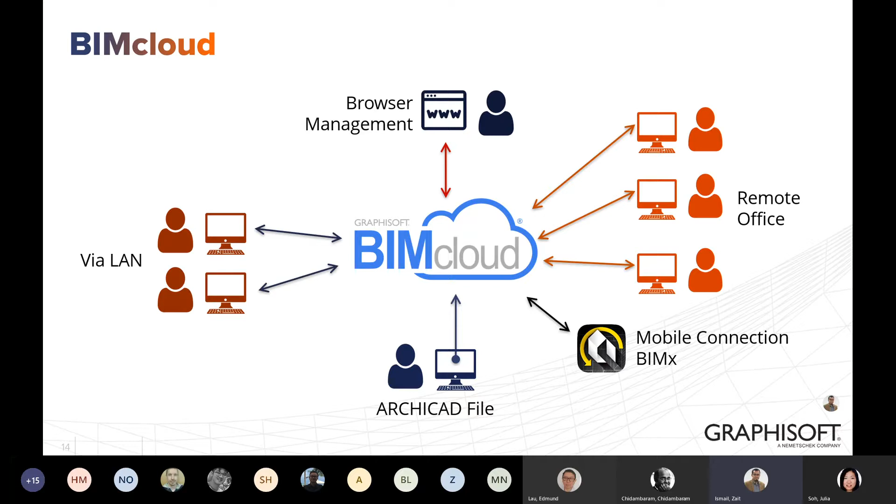So for huge firms, there's BIMcloud, which is the paid version, but it can be accessed through various remote offices around the world.

Basically, there are 3 basic components of BIMcloud. First of all is Archicad, the authoring tool. Then the BIMcloud server, where we store all our projects and data. And it also has a BIMcloud Manager to manage all the access rights of the whole system.

For the IT structure, it's basically a standard office network. It works in any standard office setup through any standard computer network, through LAN and over the internet. So there's a two-way connection between the clients, which are the computers, and also the BIM server and the manager.

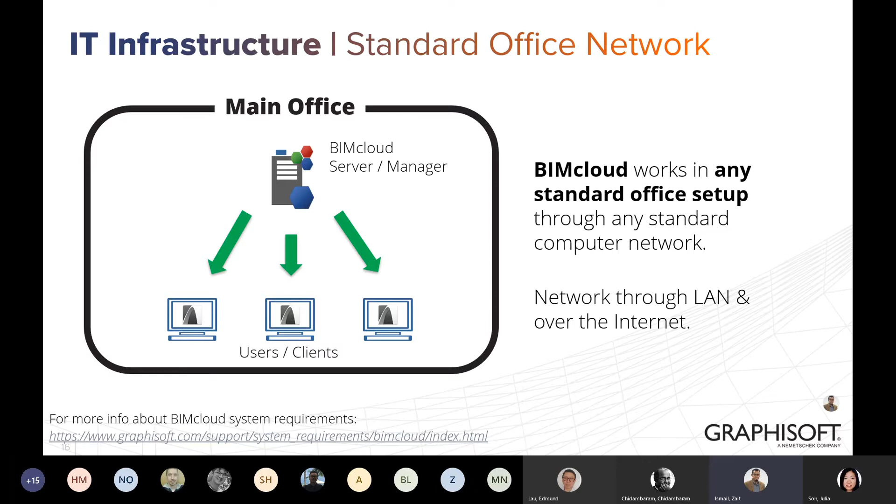So the first one, BIMcloud Basic, is the free one which I've already explained. It works within the office, but this BIMcloud Basic works only with similar versions of Archicad and BIMcloud, and it's managed by your company's IT team.

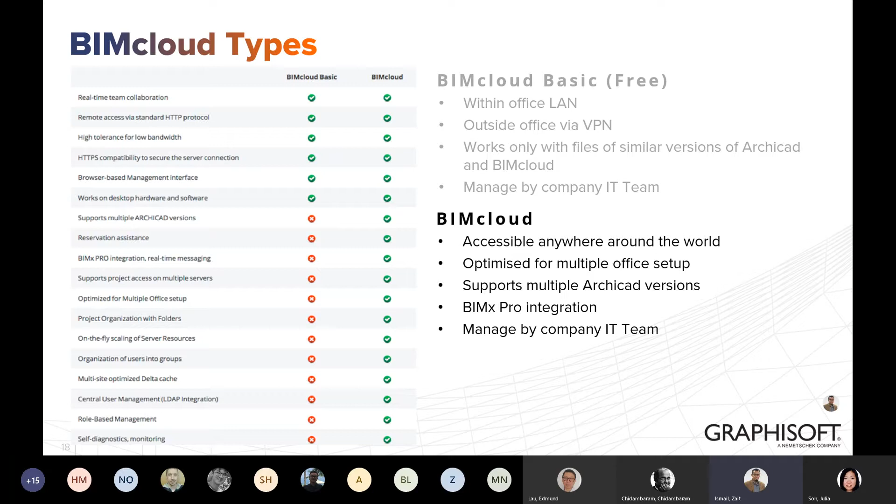The BIMcloud paid version can be accessed anywhere around the world, and it's optimized for multiple office setups, supporting multiple Archicad versions. There's also integration with BIMx Pro, but it's managed by the company IT team as well as the hardware.

But there's also BIMcloud as a Service. It's almost similar to BIMcloud, but this service is actually managed and handled by our Graphisoft team in Budapest.

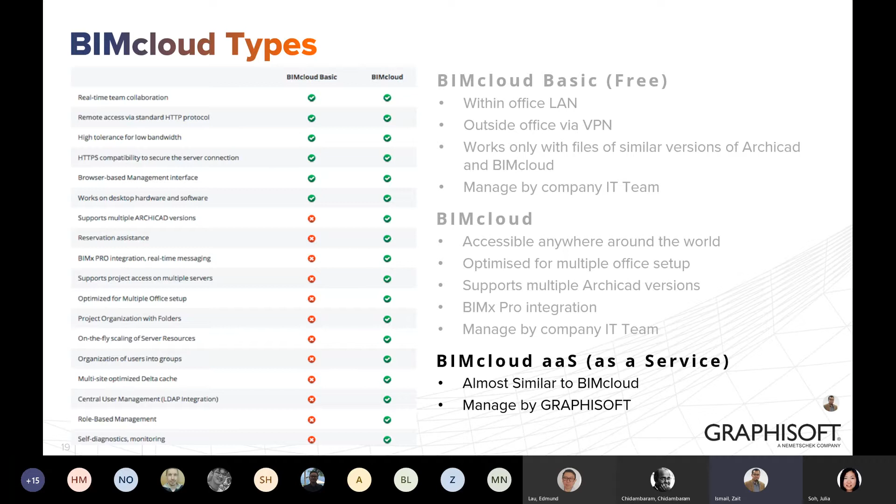So basically, in the BIMcloud Manager, the user or the IT manager, whoever is in the team, will have to have a login credential. This is important for security. Then you can access all the projects, users, roles, and libraries.

For today, I'm going to also talk about roles. The roles are quite important because they involve security and all that. So by default, we always have roles like architect, draftsman, and lead architect. The lead architect role will be higher than the draftsman or the viewer.

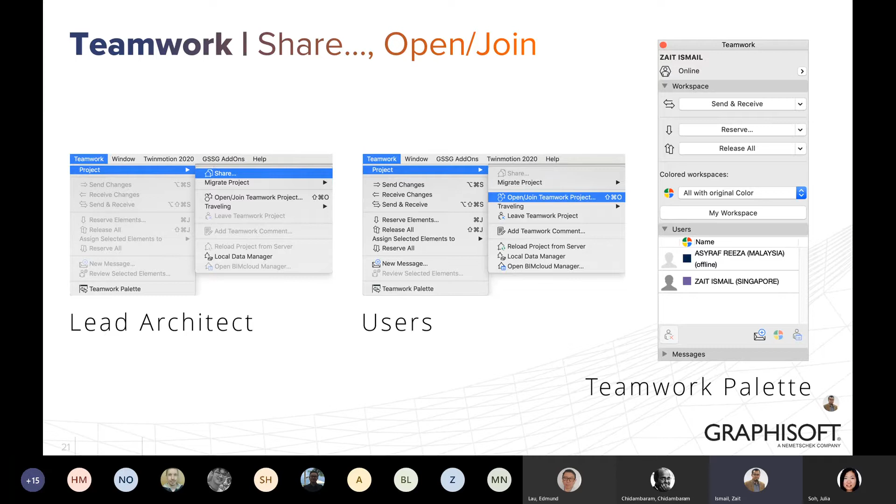So basically, what users would do in Archicad: when a lead architect does something, even a simple grid line, he would go to the teamwork menu, go to the project, and then share the file. Then the rest of the team will go to their own teamwork menu in their own Archicad, and they will open or join the shared teamwork project. All the management of the project file, whether it's saving or otherwise, will be controlled in the teamwork palette.

Without further ado, I think I will show how it works. I'm in Singapore right now, and Asyraf is in KL, so I'm going to show you how this thing works.

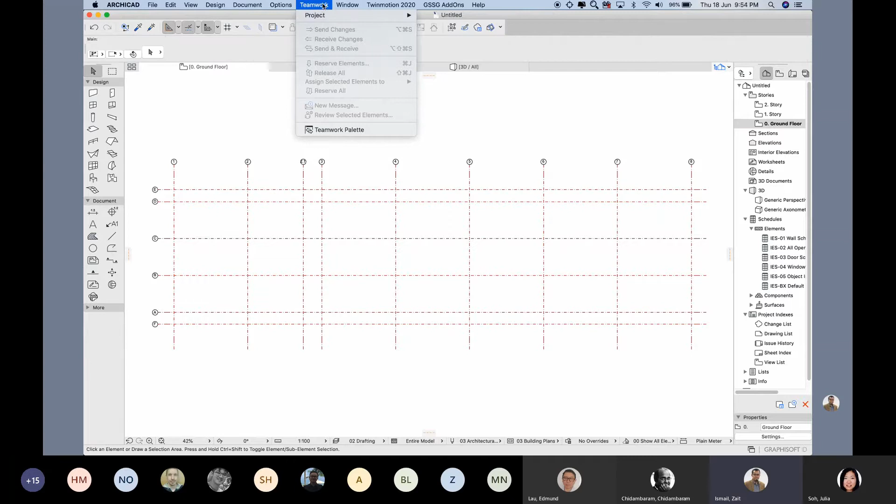So basically, let's say an architect has done a simple grid line. You will just go to the project and then share. He will share the file, right? So the next guy who comes in from another machine will join the project.

So this is a building that was created by our Budapest team, and I'm going to use this project. If I go to the floor plan in a real situation, I got a message asking, can we do something with this toilet? Do we need these doors between the washroom and the WC? So what I would need to do is maybe create a bubble, because I'm going to ask Asyraf about this decision, so it's easier for him to see.

Okay, I'm going to make this display order to front so he can see the bubble in front. Next thing I need to do, I need to send him a message.

To Asyraf, right? I'll put in some message and capture the view so he can look at it and open it immediately. Then I send it to him. After this, I'm going to pass this to Asyraf.

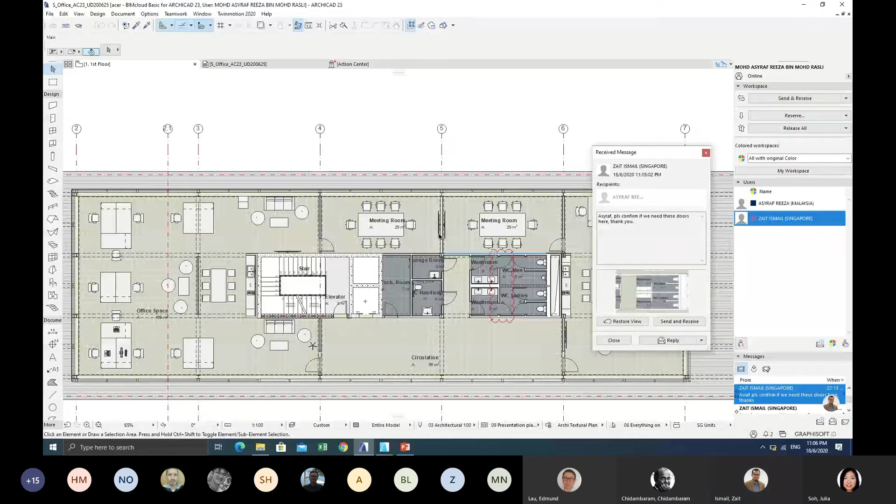Hi, okay, now I'm in Malaysia. I just received a new message from Zait. It says, Asyraf, please confirm if we need this door here. So I want to know what that is, right?

From here, I just click restore view, so now I can automatically zoom into that specific thing. I write back saying, maybe we just remove the door and shorten the wall. I set that as high priority, mark it as received changes, and then send back to Zait.

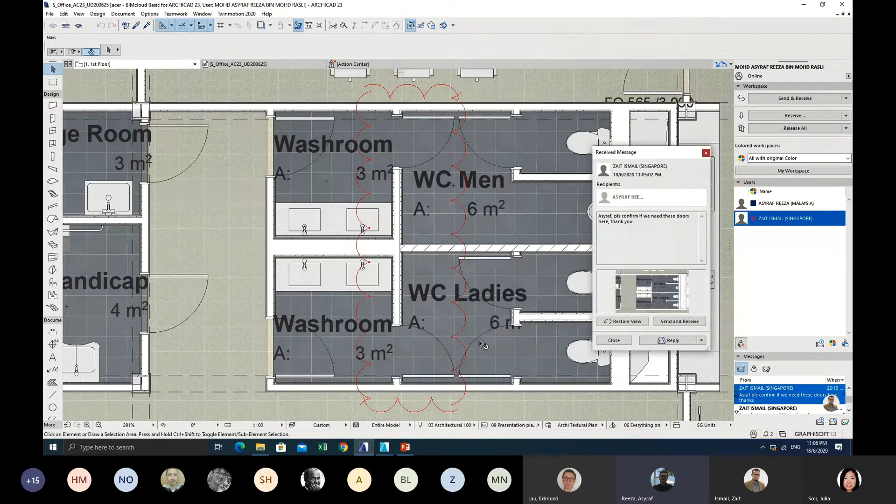Okay, now we go back to Zait. Once I receive the message from Asyraf, I need to do something, right? So we don't need it. Because of teamwork, I cannot just remove the door like that.

I need to click the reserve button because this is due to security, so we know who's changing what. So I remove these doors, and of course I need to shorten the wall. Once I shorten the wall, things are okay, right?

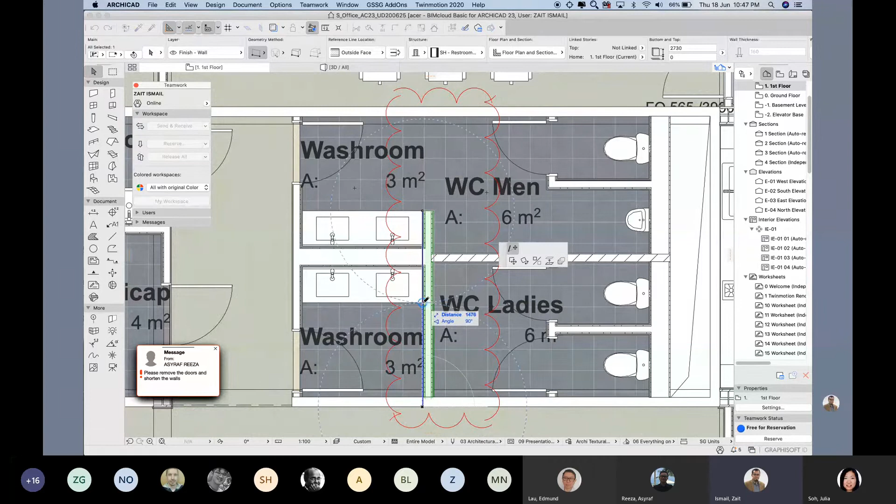So then I'm going to send the message to inform Asyraf that it's done. I'll send a reply to him. Same thing, I'm going to capture the view, and then send and receive.

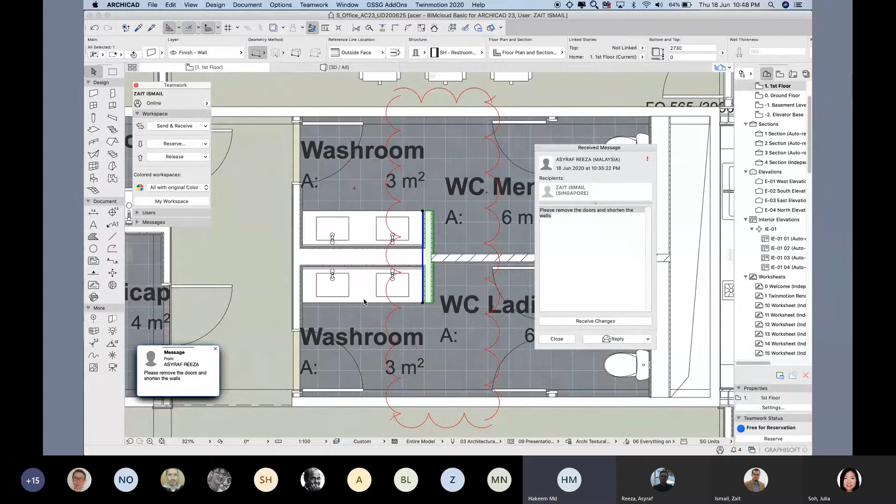Okay, from my side, I just received a new update from Zait. You can see now, automatically, when I click receive changes, the wall already gone, right?

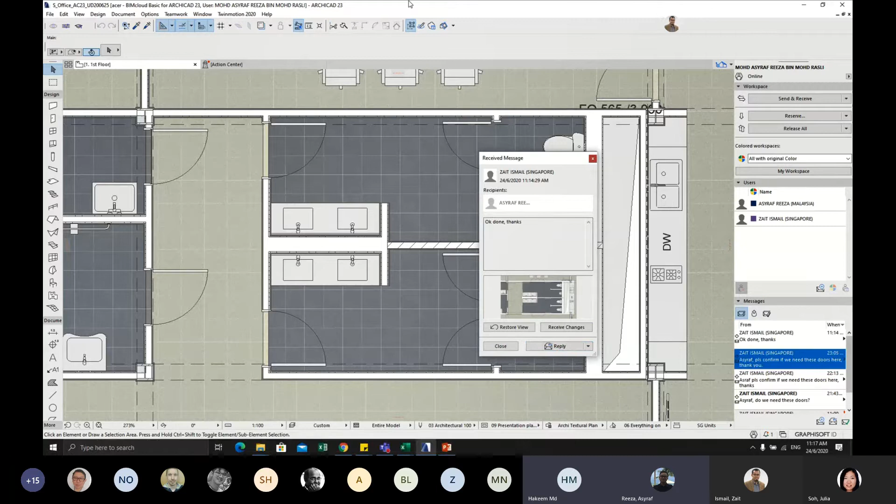So if you notice, I'm working inter-country, meaning Zait is in Singapore and I'm in Malaysia. So this teamwork can help us, especially when facing the MCO situation. You back, Zait? Okay.

So basically, in a project, communication among team members is very important. But in this case, we can do it within Archicad. And then with teamwork, whether you work at home or office, there's no problem at all. So with or without MCO, work still goes on, correct?

And then because of teamwork, it's very flexible. We gain speed and productivity too, so maybe we have a shorter deadline for some reason, and the bosses can allocate more staff to join in. And then coordination and collaboration is done in real time.

That's the best part of teamwork, so any changes you see on the spot, right? Okay, so now this is the end of the teamwork demonstration.

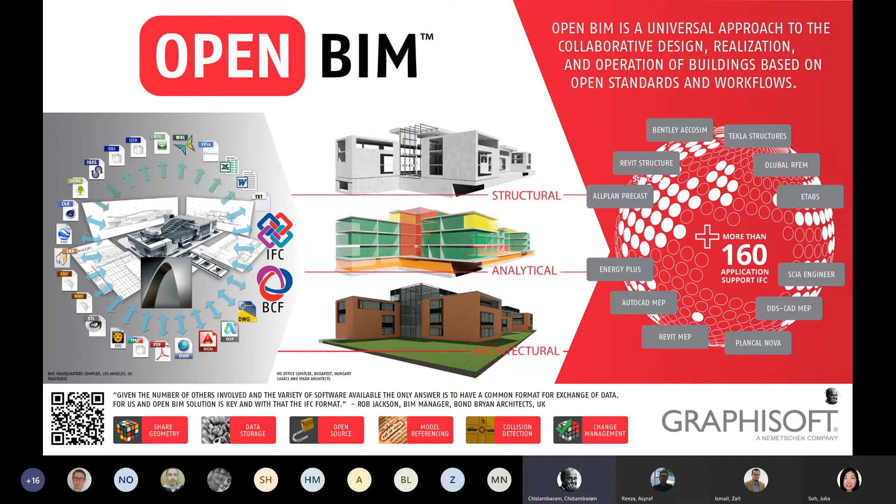This can be used to come up with your own architecture. This example is coming from Nikken, Japan. They basically use Graphisoft Archicad as a central platform and bring in data from many different formats, many different applications. You can see Tekla is there, ETABS is there, Revit is there.

Even they use tools like DIALux. Of course, we have Rhino Grasshopper connections. So some of the connections are natively supported, some of them are through IFC, some is maybe by text files. Nikken also developed their own converters, so those are highlighted in red, you can see that.

So basically, when you decide on a workflow, you have to form something like this - who is going to use which software and how you are going to communicate, what is the format. Once you've decided, you can go ahead with the project. In this case, Nikken is using Archicad as a central platform to bring in all the data, because Archicad supports many different file formats.

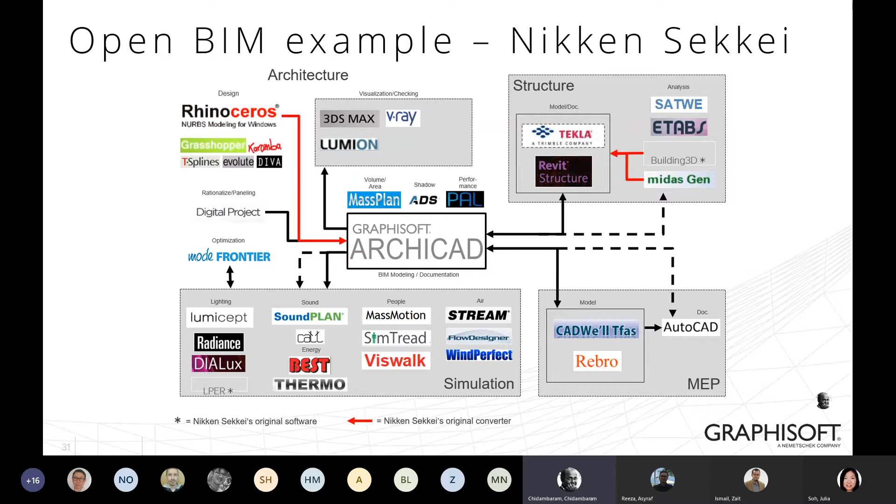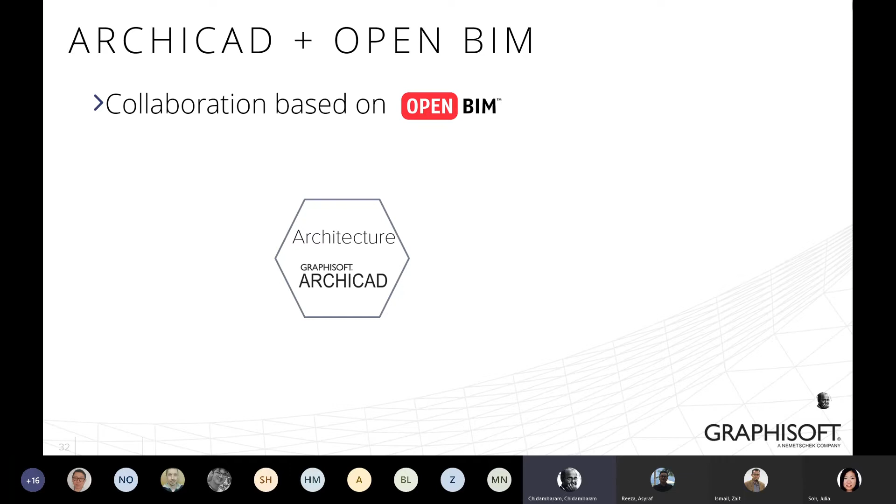Right, so next I want to share some tips and tricks. The first thing is, what is the possibility? When you do projects, what can happen? The first thing, you're all using Archicad - that's why you're all here, I know, right?

So maybe your engineer or somebody in the partner is using Tekla for civil and structural. So what you can do, how you can exchange between them, is we call selective exchange and a reference model concept. These two concepts I will explain in the next slides.

Similarly, what happens is maybe you have a MEP engineer who is using Revit. Then you can do the same thing - selective exchange and reference model - between them. And when this happens, definitely you need a tool like Solibri, which is also handled by our team. We can actually bring in data from different BIM authoring tools and federate inside Solibri to check the quality and also regulatory requirements. You can check the model, and once the model is fine-tuned and in good quality, you can exchange with your QS, and they can do cost estimation.

They may be using different software - if you see here, every party is using different software. So that's basically the Open BIM concept. You don't need to restrict anyone to use a particular brand, particular version, or any particular software. You can use many different brands suitable for the purpose, right? So it is meant for the purpose, and it's easier.

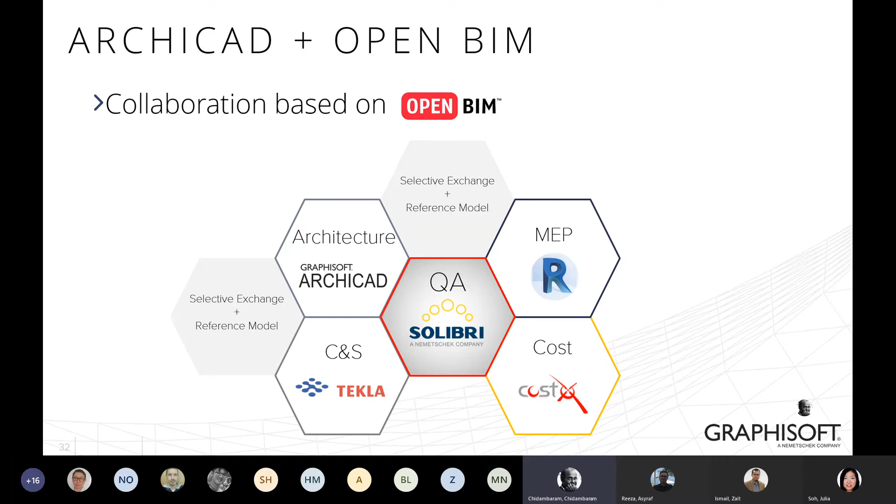So let's move on, and we want to understand what selective model exchange is a bit more. It means exchanging only what is necessary for the project partner. If the project partner needs only certain information, just give them that information. Don't give the entire model and ask them to figure out how to extract it.

By doing this, it's easy to communicate. For example, structural engineers are interested only in structural elements, like load bearing elements. We can use Archicad to filter and send only the structural elements out. Similarly, MEP engineers are always interested in rooms, the spaces. You don't need to send the entire column, slab, and all those things. Just give them the rooms, and they should be able to work on it. So that's the selective model exchange concept.

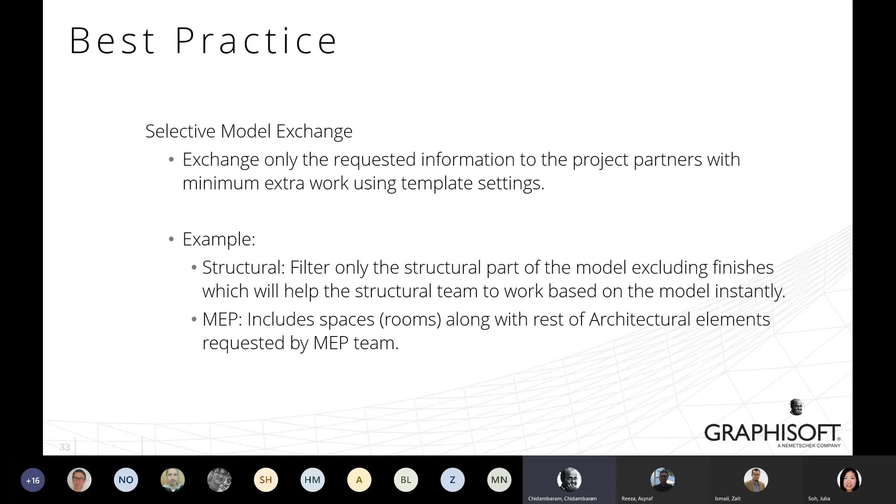So the next concept is reference model concept. What is this actually? Reference model concept helps in change management. The team shall keep the IFC file import as an independent native file, in Revit or Archicad, and link that to their project. So don't import the IFC file into your project. Ask your partners also not to import the file into their project, but keep it as an independent native file.

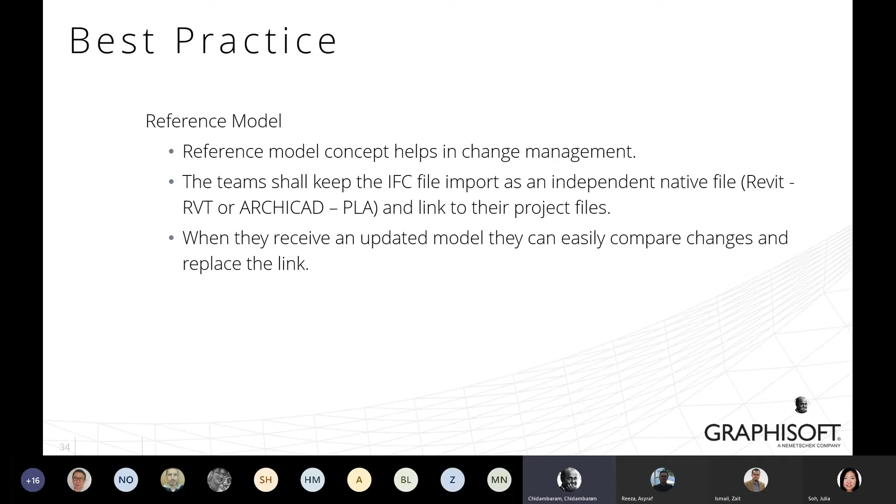Then, in case you receive an update, you can update the model easily. If you put it inside the project, you don't know which one is created by you and which is from the IFC import, and that will cause a problem. So it is good to keep it outside. Then anytime there is an update, you can replace it.

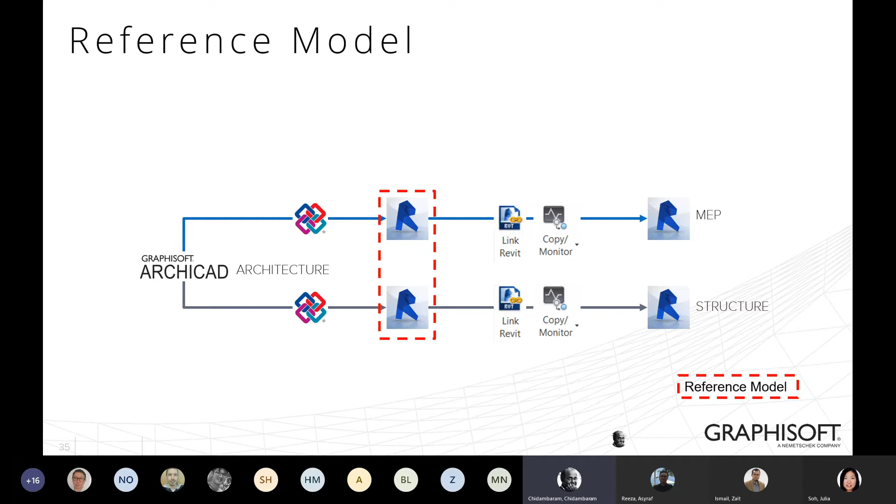So that's depicted in this diagram. You start with Archicad, architecture, or any discipline. Once you have it, you export as IFC, and the partner receiving it can create an intermediate Revit file, which is the reference model. This can be linked into Revit, and in Revit the project is there for MEP and structural. They can link your Archicad model and work on it. Once they finish their design development, they communicate back to you.

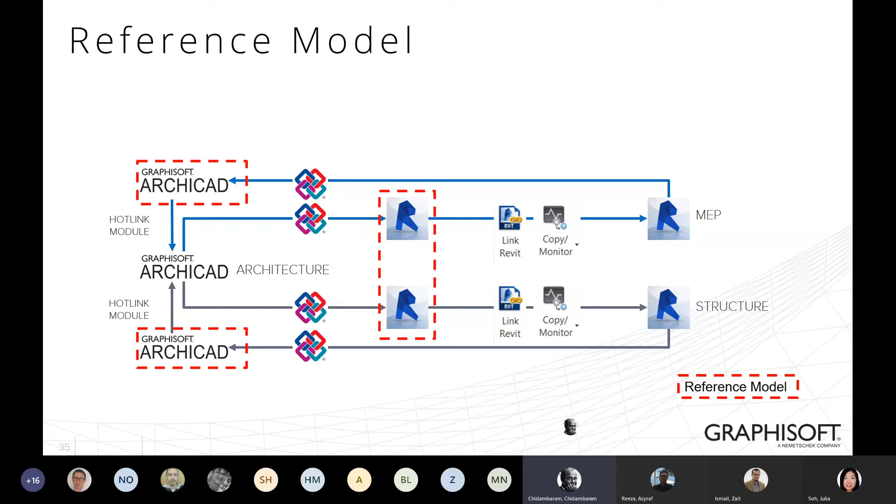They send it back via IFC file again, and when you receive it, don't put it into your project. Create a separate Archicad file, which is again a reference model, and this can be hotlinked into your Archicad project. This way you know which is coming from your partners and which you have created, and it's easy for you to trace reference. You can compare them and work on it easily. So this is the reference model concept.

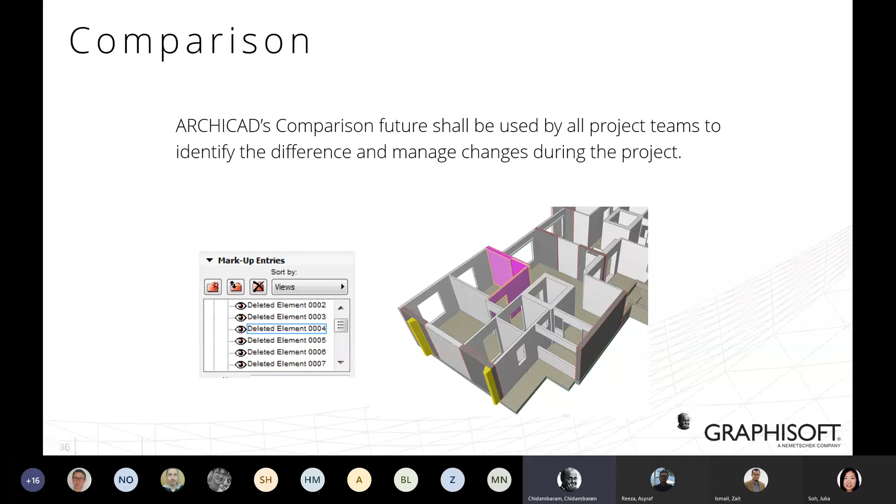So comparison is a good way to see what is deleted, what is added, then you can decide what to do with it. Similarly, I also like this feature of Archicad always.

You can do a trace reference. You basically import the IFC file and create a 2D view of the structural model, put it below your architectural floor plan, and check using the trace reference what has changed.

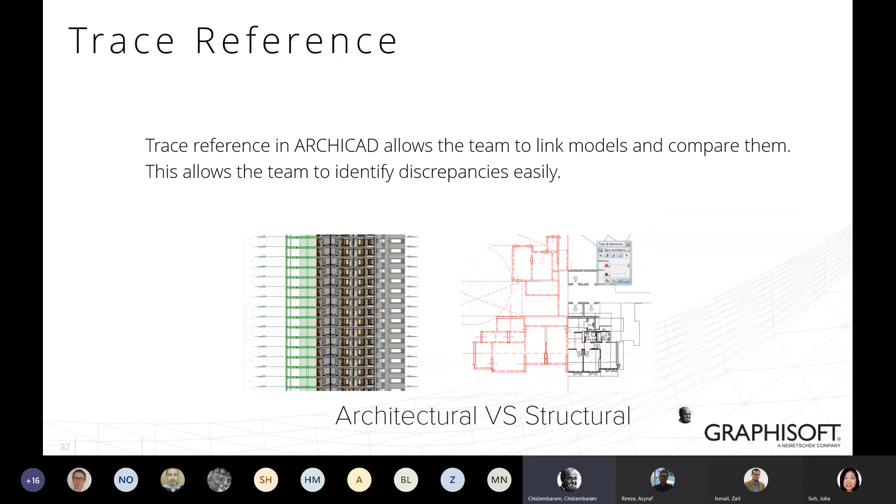And the next tip I want to share with you is BIM collaboration format. This is the file format, another open BIM format. You can use this to communicate your issues. You can document the issues inside Archicad, inside any other tool, or even inside Solibri. This can be saved as a BCF file, BIM collaboration format, also coming from Building Smart. This file will allow you to communicate and document the entire issues. It will have the snapshot of the place, the location, and even the camera location.

It will bring you to the exact location, and whatever comments added by you will be seen there. The file is really lightweight, so you can just email it over. You don't need a server to do it. You are not exchanging the entire model, just exchanging the file.

It's much easier. So in case your bosses receive this, they don't need to have Archicad, Revit, or Solibri. They can install a simple desktop application, most of them free, and view the BCF file and add their comments. The bosses will like it actually.

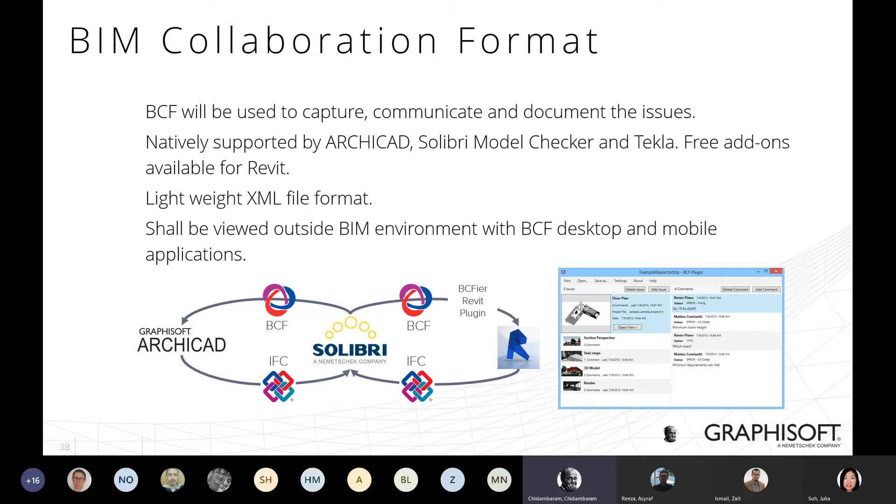So easier to manage. The BCF file format is really getting better and better, and people are using it. That should be used in any OpenBIM workflow. So if you're going for OpenBIM workflow, you must use BIM Collaboration Format.

Let me move on. So what are the other things Graphisoft offer? We developed a plugin for Revit to make it easier. We know sometimes it's difficult to ask Autodesk people for some development, so instead we developed a plugin for Revit where we can actually control the outcome.

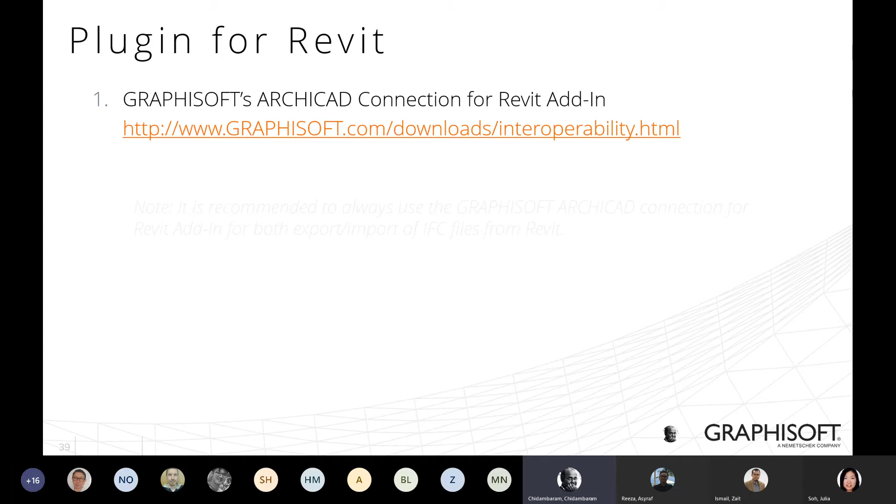This particular tool or add-on can be downloaded from the following link. What it does is it improves the export and import. First, you can look at the export - there's much more things to share here.

You can control the visibility of the elements. Shared coordinate system can be exported. You can split elements by level. Property sets can be exported, and more controls are available. So the data export from Revit will be much better if you use the plugin.

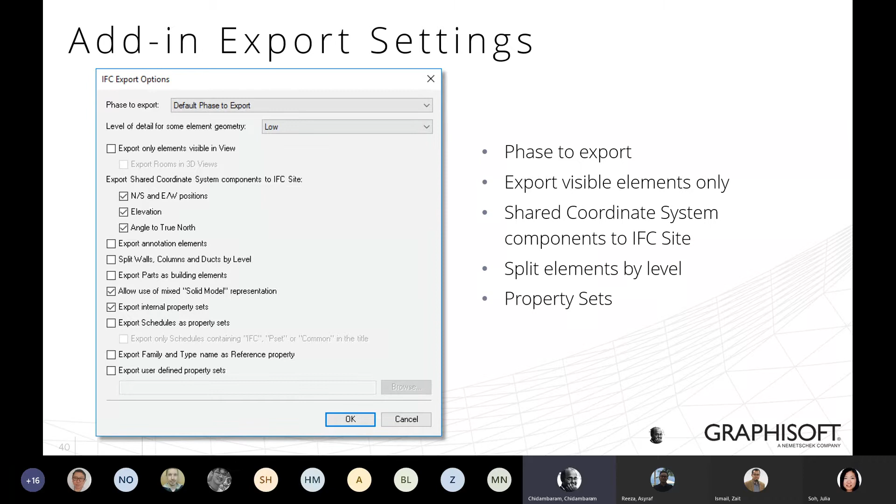Similarly, the import is also improved. Certain things I want to highlight: the true north of the data, the spaces convert to rooms, then you can import elements and auto-join things. Another thing is Revit normally uses faces, lines that become a slightly off angle - that can be corrected automatically too. So these are the improvements.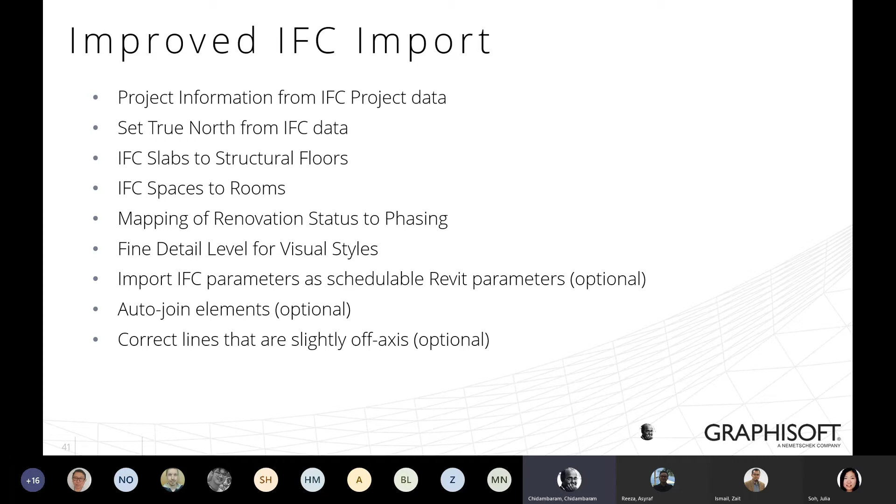Definitely it is much better to use the plugin so that the data will be better in Revit.

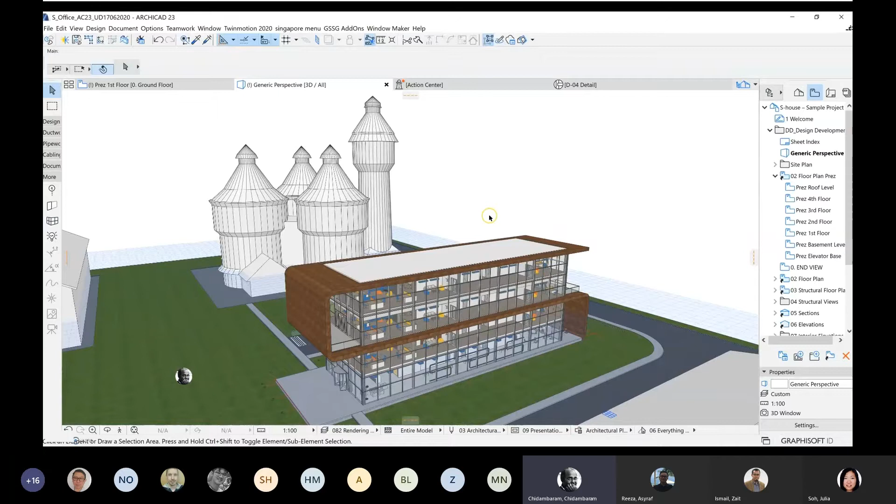So next, without further ado, I will bring it to the demo. Just to let you know, this particular demo is pre-recorded, but I recorded it in a way that I'm going to do it today here online. Because of online, I don't want to have any technical issues, that's why it was recorded. You can see the video here, I will take you through the video and voice it over.

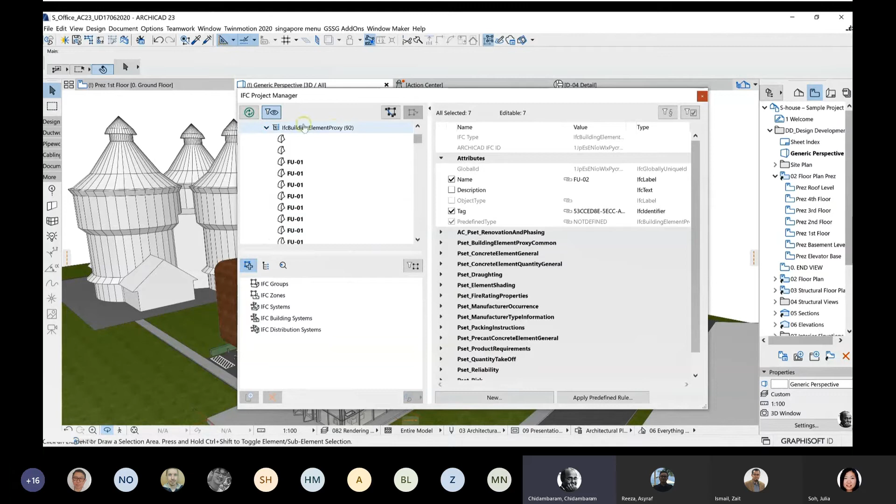This particular project is similar to what Zait and Asyraf were using. We call this the S-house, our popular model for demos. First thing I'm checking here is the data quality in the IFC Project Manager, so I can see all the data. Whenever you see Building Element Proxy, that's always the culprit which causes problems sometimes. You can check where it is coming from - you can see it is furniture.

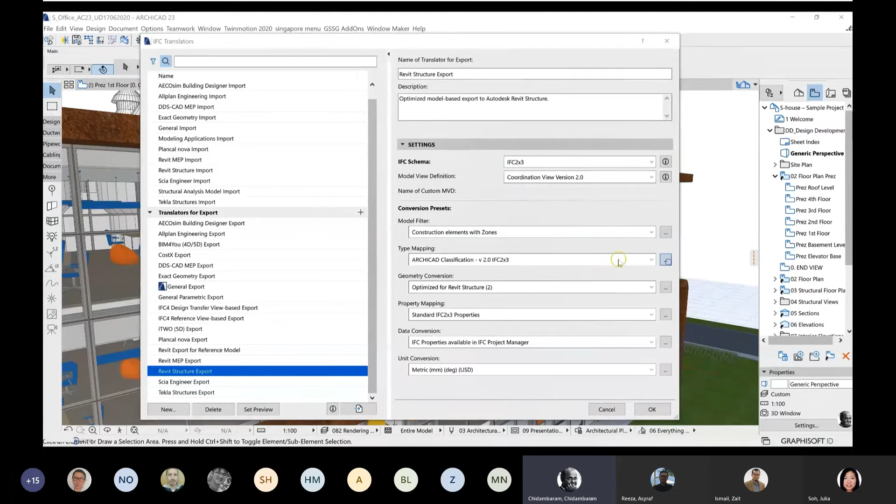I'm going to exchange the data to the structural engineers, so it's okay, I can keep it as furniture, as a Building Element Proxy. The next thing I want to check is the translator. You can go to the translators and see what kind of translators you have - there are many here, I'm checking the Revit Structure one. You can see the filters which allow you to choose what to export when you export the IFC file, and you can choose the schema, IFC 2x3 or 4. Another important thing is to do the type mapping - inside the type mapping you can choose the element and make sure it is exported right.

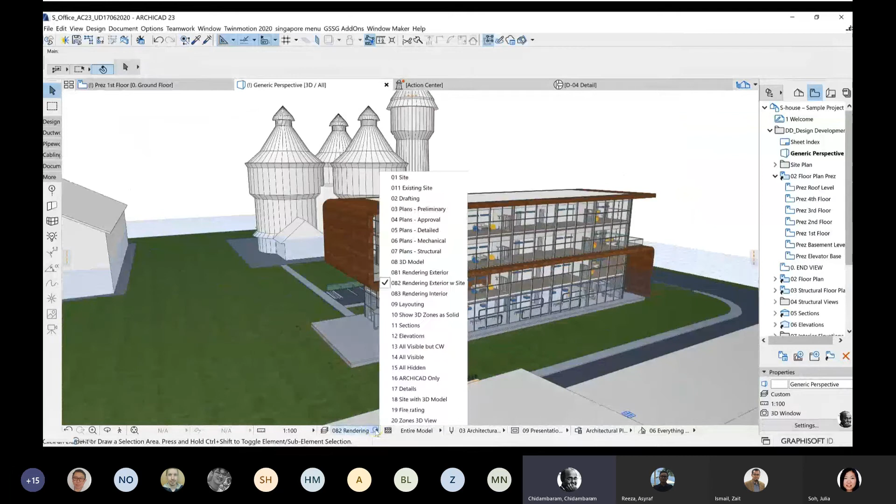So in this case, the slab goes as IFC slab, but I want it to go as a predefined type floor, so I can change that, which will go as structural slab when it goes to Revit. Once that is done, selective exchange comes into play.

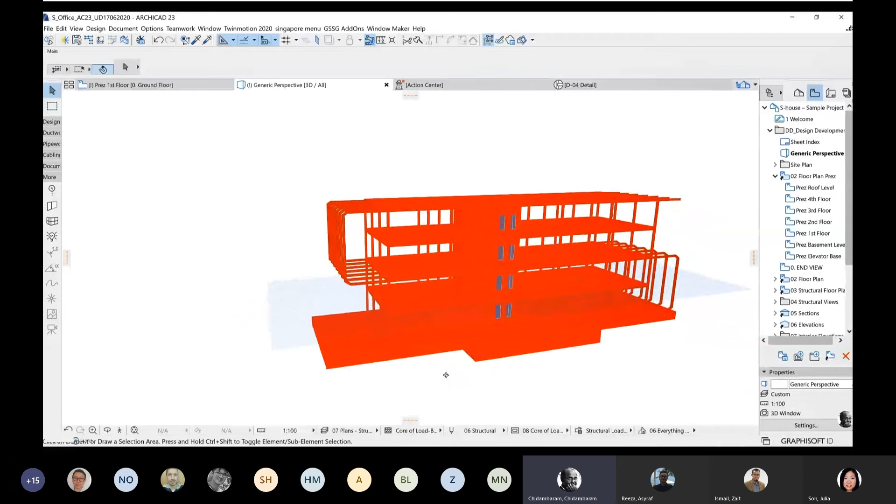I'm filtering and showing only the structural elements, controlled by layer and pen, and I also want to change the visualization to check whether my selection is correct. When I look at it, I realize there are some doors also there, so I check my model to see what is going out. Now everything is OK, except there are doors.

For the doors, it is controlled by the filter, so I go inside and uncheck the doors and windows. I don't want to exchange this to the structural engineers. This is what I was talking about in selective exchange - structural engineers receive only what they want to receive.

Everything looks fine, so now I'm ready to export. Saving an IFC file from Archicad is just go to File, Save As, choose the file format and the translator, and save it.

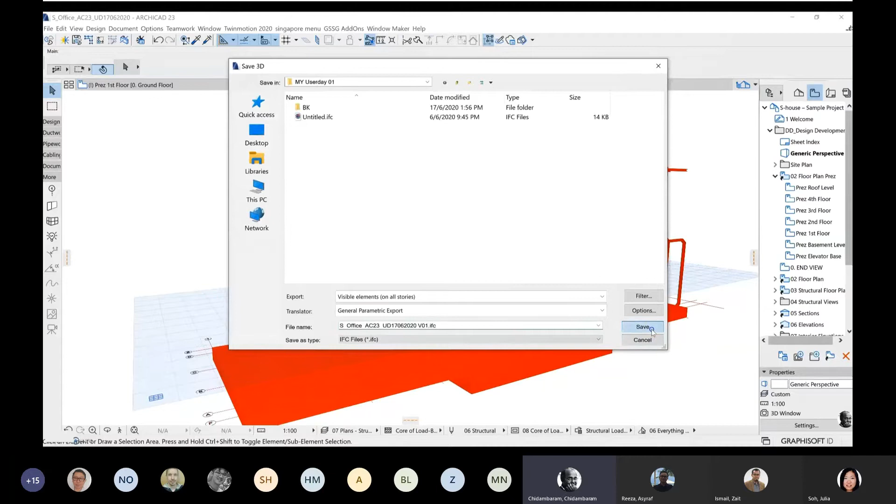So that's saved, you can see the file is going. Normally Archicad is quite fast. I will let it run in actual time - I didn't cut short any of this - to show you how much time it takes.

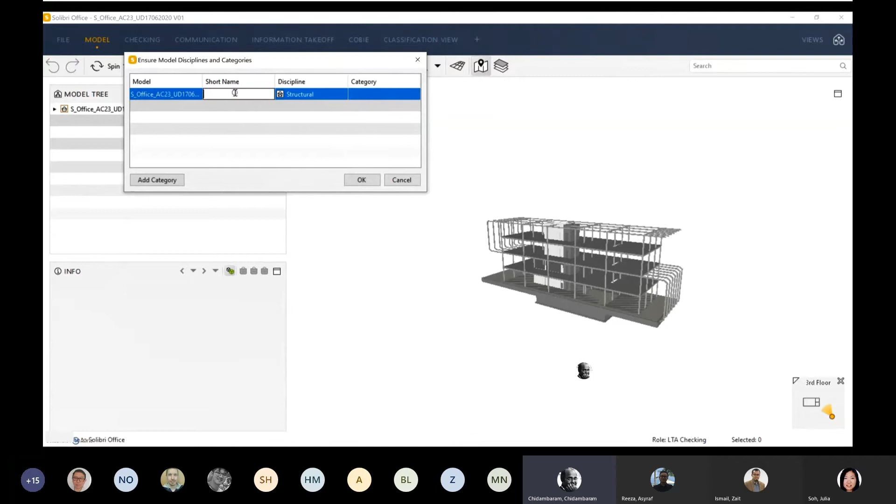So you can see here, I'm actually checking the model in Solibri. This is a good way - you can bring in the model to a common platform like Solibri to check the status of it. You can actually check and realize the big floor slab is missing.

And then I come back to Archicad and check that particular slab here, to see what is happening to the slab, and you can see there is a solid element operation.

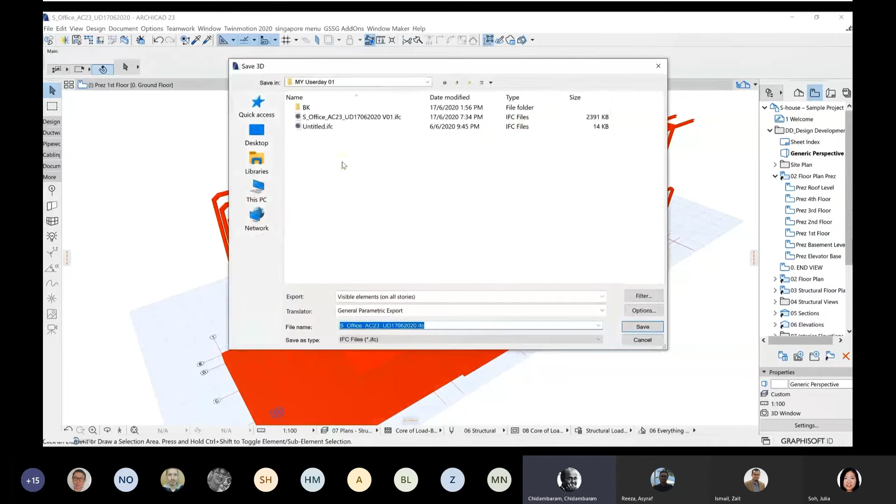This solid element operation causes some issues, so I uncheck it. It doesn't change the shape of the slab. I export it again, this time to another version.

So you can see it is going in. I'm saving the file now.

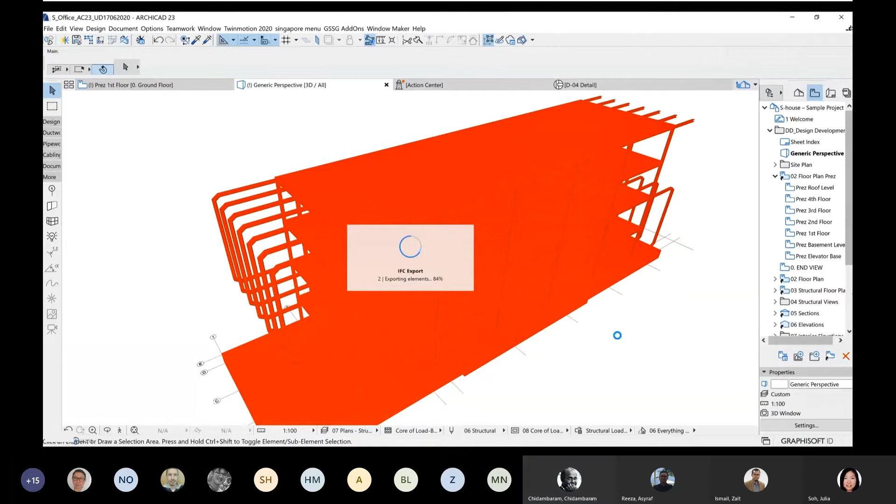So now I go to Solibri to update and check, make sure it is correct. I choose the update model, and here I choose the version I just exported. Then you can actually see the update coming in. Everything looks fine for me.

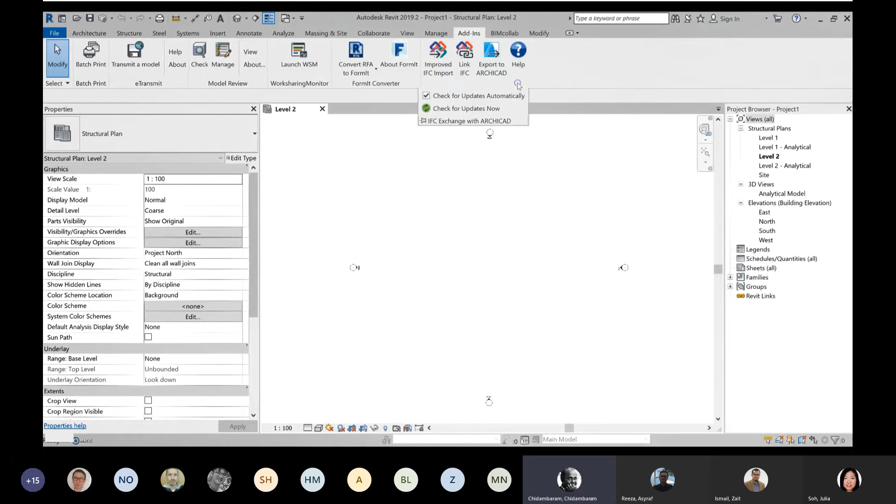Now I switch to Revit. I'm ready to check in Revit, and I'm using the plugin developed by Graphisoft and choose the IFC Import.

This version is OK, and I choose the functions - I want to auto join elements and correct the lines. Then I open it.

I purposely leave it a bit to show you the actual time taken. Normally, be patient with it. This needs to be done at least once for a project to check the quality of the data. First time when you are exporting, there will be some missing data and things like that. Also note about the time taken for Archicad - if it takes like 10 minutes to open, Revit may take 30 or 40 minutes. Sometimes it depends on the file complexity, but here you have to go through this once.

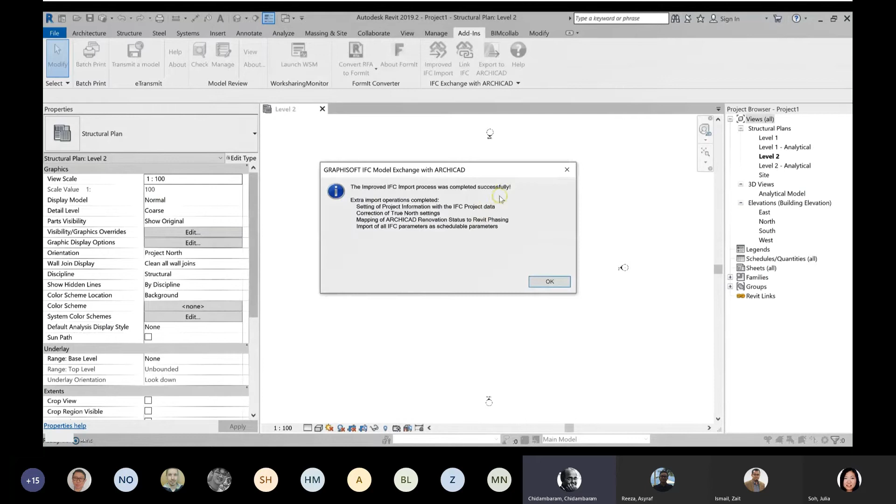So you can see some errors coming in, so better to visualize it in 3D. I'll say OK here and go to the next step. It will go through the import anyway without stopping. And you can see it is imported successfully. I'll say OK.

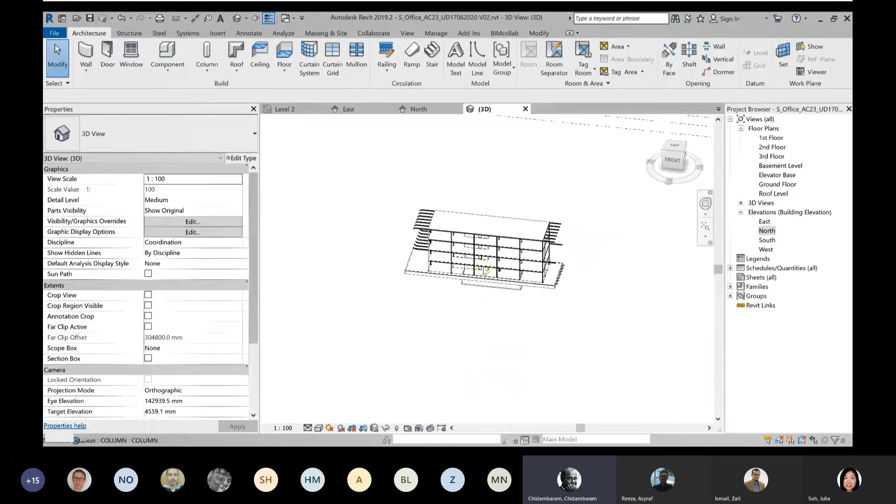Then you can see the content in 3D to check. First it opens in section, so I need to switch to 3D window. When I click on the 3D window and zoom in, I realize what is missing actually - you can see those elements, the vertical ones, are missing. There are also some horizontal members.

So I'll check on the other side also, just go below and check. I'm OK, I somehow know what the missing ones are. Now I want to go back to Archicad and check what is happening to those elements. So when I check in Archicad, I select those missing elements.

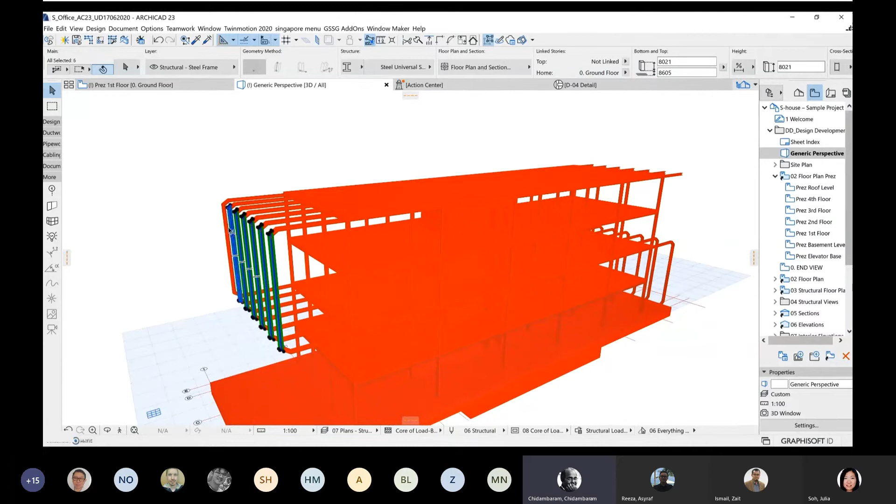I can go to the settings of those vertical elements, which is created as a column, and check what is happening there. Then I realize there are actually end cuts there - this end cut is the one causing the problem. I did the check before, so I know it. You can see it looks a bit ugly, never mind - the engineers, what they need is the position of the column.

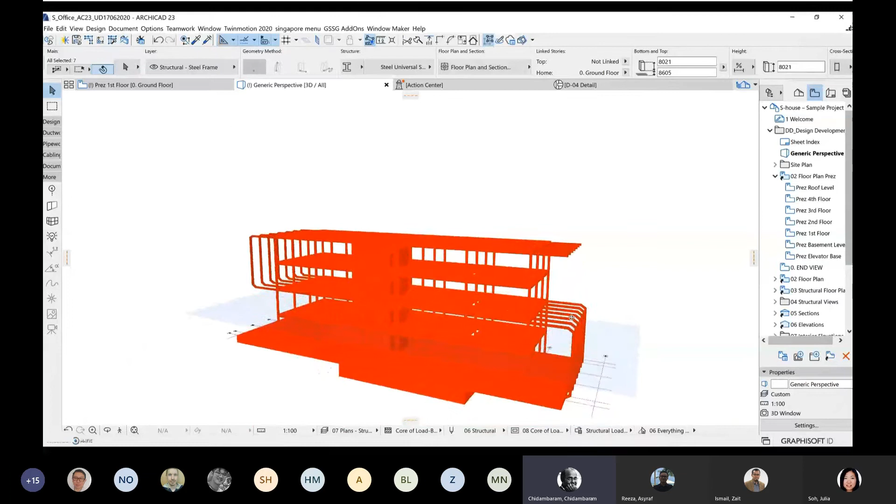So I'll just leave it as it is. You can actually do the same thing on the other side as well. So again, all this can be saved once, and then we can actually use the same setting again before we export. We can change the setting.

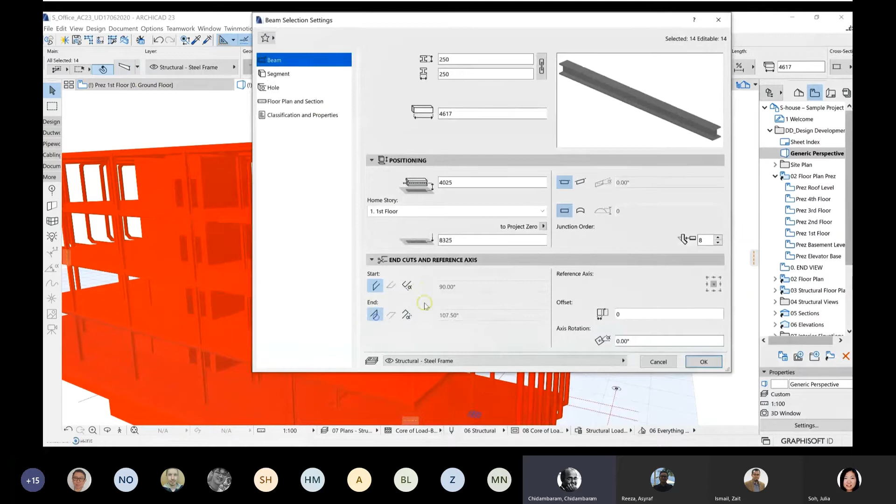It no need to be saved as part of the architectural model. You can actually do it only when you want to export, because the architecture model, I don't want it to look not nice, right? So the connection have to be nice. So that's done. I save as another version. This time it's version 3.

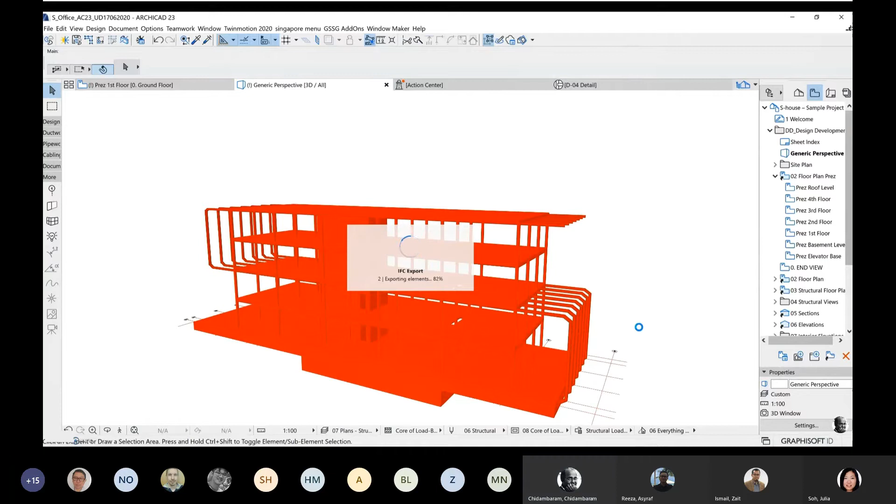Just be a bit patient. Once it is done, I can now go back to Revit and then I can import again. This time I choose version 03, right? So I will open it.

Ricky was asking, is there a list of known issues? We have to check on a project by project basis, figure it out each time. Some projects, every project have different issues actually. So once you figure out what is the reason, then at least we know that issue doesn't exist anymore for that project. Because on both the Revit and Archicad side, these tools are getting updated all the time, so it is very difficult to define the list of known issues. It's a common question people ask, but it is difficult to define actually, right?

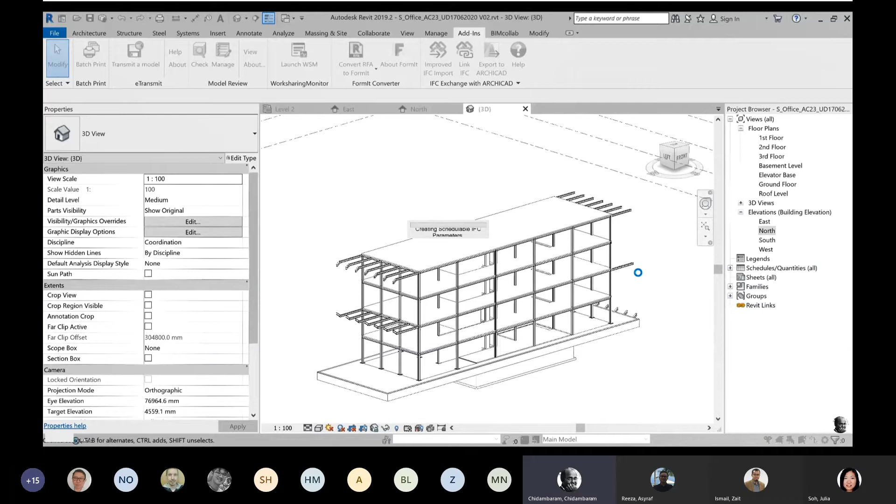So once it is exported, you can actually see this time it doesn't go through that error, right? It straight away goes to the import option. So the import is already fixed, there is no error shown. So this is how I figure out what is the issue, then I fix it. It's a bit of trial and error, I have to say. But yeah, everything is okay.

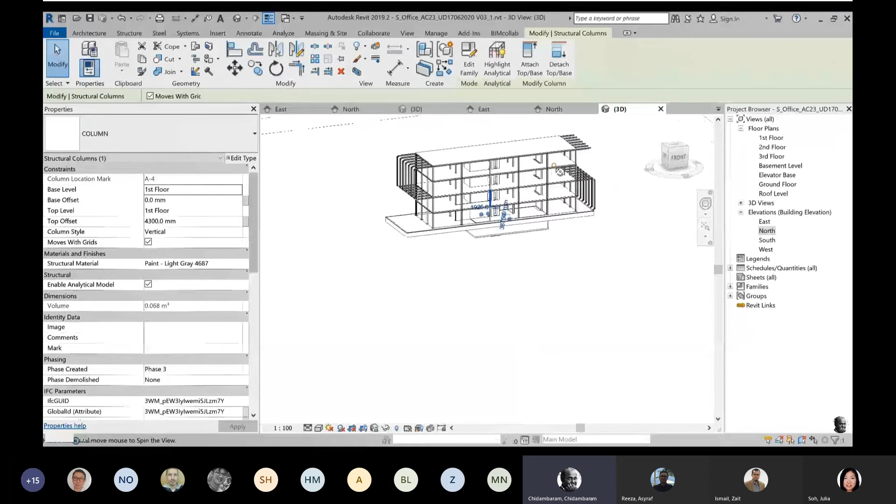You can see the vertical members and horizontal members are there, so everything is clean, right? So this can be used as a reference model by the structural engineer to continue their work.

But there is also alternative things, like you can actually use the view template in Revit to control the display of the floor plans. In this case, I'm creating a view template for the structural engineer, so if they want to continue with the same plan, they can do this as well. They can go to structural plan and set the settings.

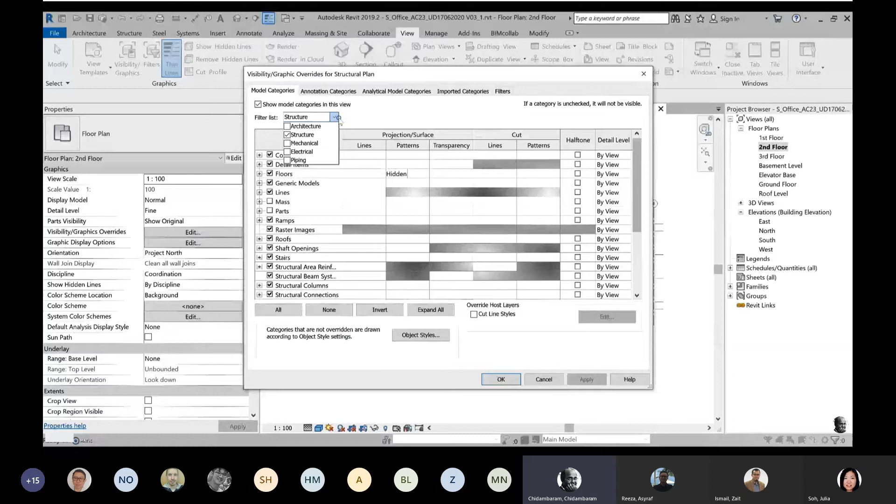Right, so first I'm checking everything is okay. I go to overrides, model and make sure the structural discipline is the only one shown. Then I can actually move down and set the model display to hidden line.

Then further down, I'll set the view range. This is very, very important. As architects, normally we show this view range like this, but we need to set the view range correctly for structural engineers here, and you have to set it minus for the bottom, because they want to see the floor below. So that's a very important step, right?

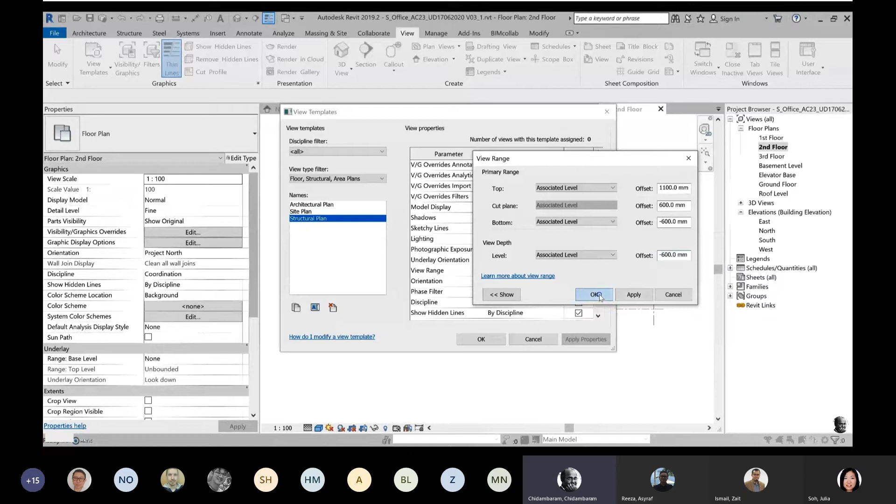Once it is done, you also need to choose that it is only showing the structural discipline, and I want to have hidden lines for all. I'll choose that, say okay. Once this is done, I apply this view template, and this will show the structural model very clearly in the plan.

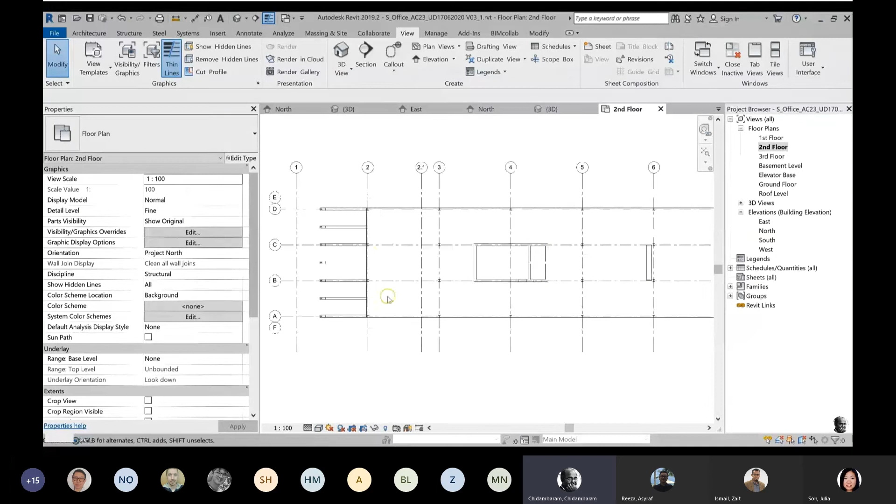So now you can take a look at it. It looks like a model created in Revit itself, right? So you can see the model, right?

Basically, once this workflow is sorted out, you can actually use the same process again and again. You have to reserve a bit of time for exchange. If you are exchanging weekly, then maybe reserve about 2 hours or so to exchange and ask them to check. Once this is sorted out, every time you can pass to them the IFC file, and the structural engineers know how to handle it, then the project will go very smooth.

So many projects are now going for OpenBIM. I thought this is a very good topic to share with Malaysian users at the moment, because we still have a lot of Revit users who are using Revit for structural engineering. So you may need to work with them. That is the main reason we chose this topic.

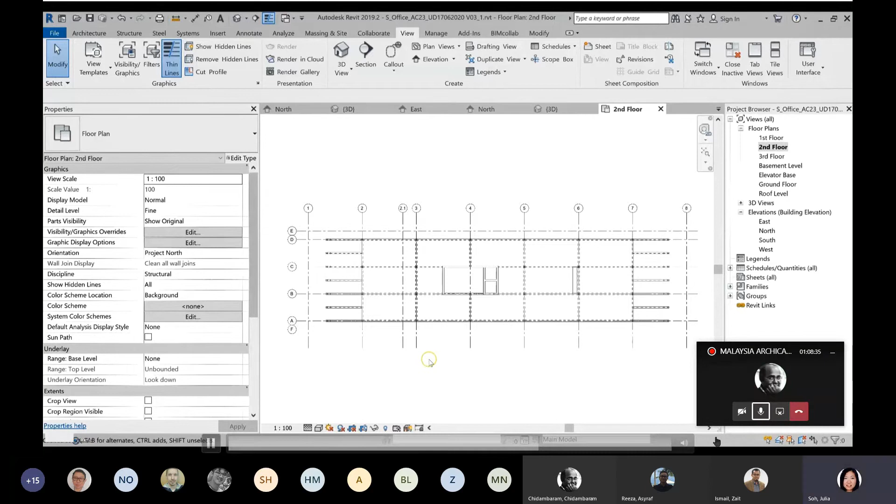Julia, you can. Okay. Can you hear me? I think someone has unmuted me earlier. Hey, someone has muted me earlier, so sorry about that. That's why I had to unmute myself.

Thank you, Chidam, for the detailed overview and demo on OpenBIM workflow with Revit. Before we move on to the Q&A session, I would like to provide an update on our upcoming events and activities.

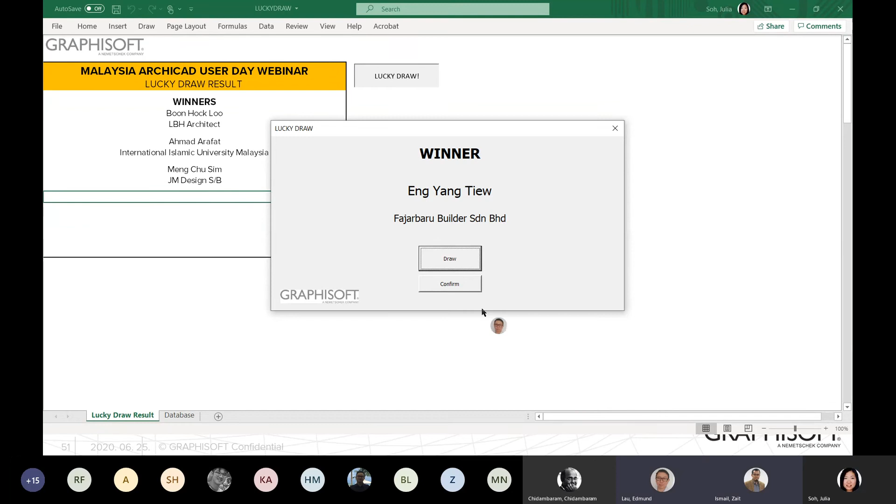Calling once, calling twice. Okay, let's redraw. We have Mr. Tiew Eng Yang from Fajarbaru Builder Sdn Bhd. I think he's not here because he messaged me last minute that he had a meeting. Okay, let's draw again then. And we have Miss Lilian Hui from Architects Karani.

Please identify yourself either on the chat, or raise your hand, or unmute yourself and identify. Okay, let's move on in that case.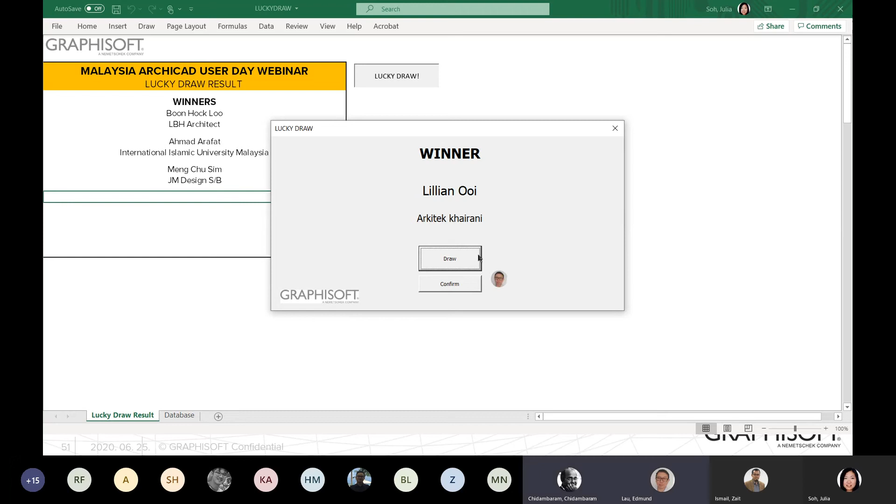Okay, again, we have to redraw. Mr. Seong Aun Chan from Arkitek Daya Seni Sdn Bhd. Are you here, Mr. Chan? Okay, he's here. Congratulations to you.

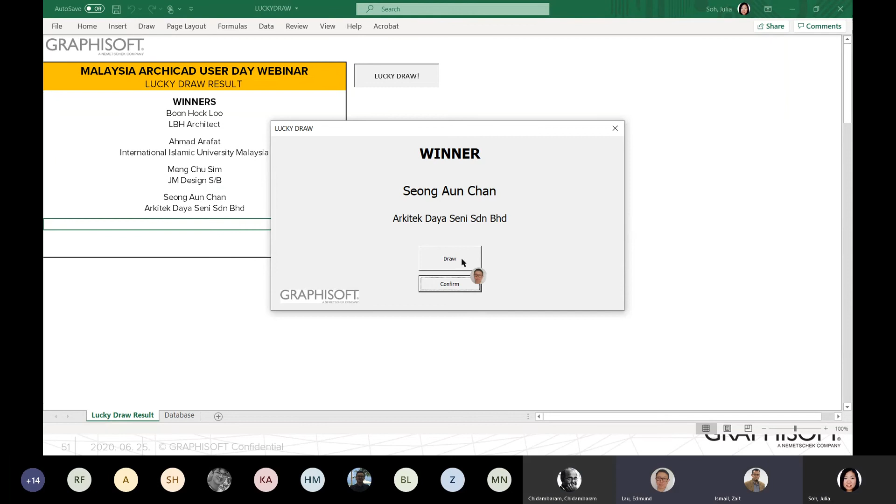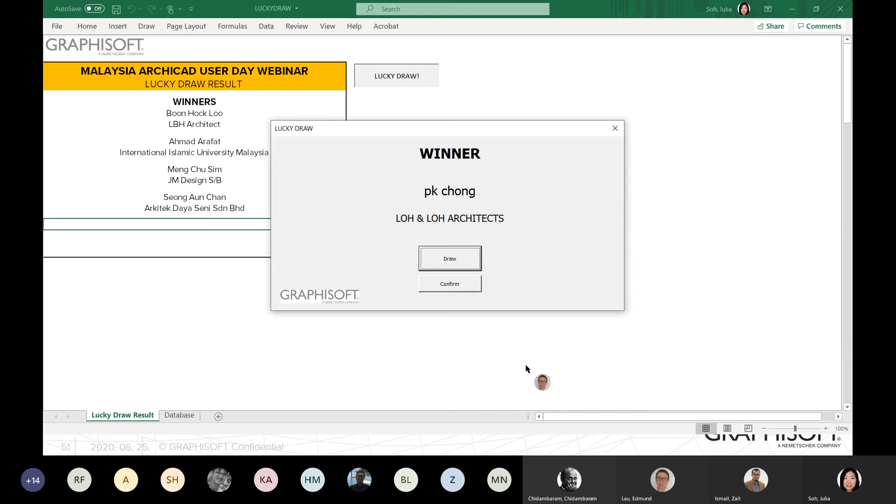So this is the last one. We have Mr. PK Chong from Loh & Loh Architects. Are you here, Mr. Chong? Okay, so seems like we have to draw again.

Mr. Fazli Hussein from IMA Architects. Are you here? Yeah, I think I saw Mr. Fazli. Yeah, right, here it is. Congratulations to these five winners.